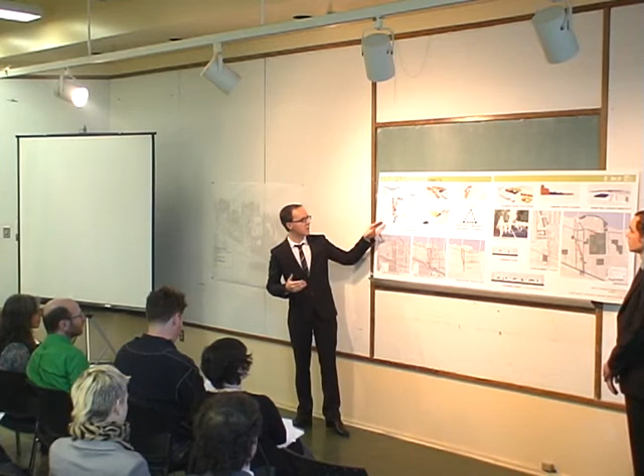In studying the area, we've identified three key issues, three challenges that the area must face. The first is poor accessibility. The train tracks to the south, Rivière des Prairies to the north, the high degree of traffic volume along Laurentien, and the size of the hospital parcel of land all serve as physical barriers that reduce the accessibility and the mobility of the residents.

Second, we've identified poor community cohesion. These barriers, combined with demographic trends and differences, particularly between the south and the north, create a lack of interaction between these different communities physically and a difficulty for that to bring them together among community nodes.

Third, we've identified an insufficient supply of goods and services. The lack of local employment and the lack of local commerce leads to more residents doing their shopping outside of the area and a low level of employment for the residents within the area.

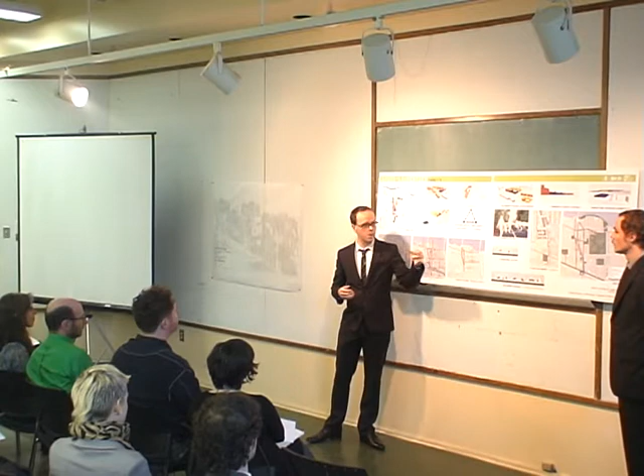So from these issues, we'd like to share with you a vision of a Gouin-Laurentien that's more livable, more walkable, more well-connected, and to put forward three goals: to improve the mobility and the accessibility of the area, to enhance the cohesion, and to increase the availability and the diversity of the supply of goods and services.

We'd like to increase mobility and accessibility primarily by reducing the role of Laurentien and La Chapelle as commuter corridors, and by reducing the barriers to internal and external connectivity.

We enhance community cohesion by removing these barriers that prohibit and inhibit groups from interacting within the community while building community nodes that can bring the disparate sub-communities together.

And we've increased the availability of goods and services by densifying certain corridors and transit-oriented developments to grow the population and increase the demand for goods and services. So these are the objectives that we'd like to share with you.

But before we go into the concrete actions, we'd like to consider the daily life of a resident in the area. Consider a young woman living in the area south of the hospital, which is primarily residential housing, a high degree of recent immigrants to Canada, and a comparatively low income to the northern, largely homeowner area.

In the morning, she might drive her car to drop off her son at school on Granite, her daughter at the daycare on Gouin, before having to drive downtown or to Marché Central to apply for a job. But her choices and her availabilities in life are dictated by the modes that are available and convenient for her. And in this case, and in this area, it's largely an auto-dominated mode choice.

So I'm going to share with you one of our primary areas of focus, being the transportation network, which is sort of a broad strokes approach.

Three key specific areas that we see for redevelopment and for densification are the Gouin Metro here in the north, the commercial sector on Laurentian Boulevard, and an area at the intersection of Laurentian and Salaberry that we've come to call Place Salaberry as the development of a transit-oriented community and commercial center, which Gabrielle will share with you shortly.

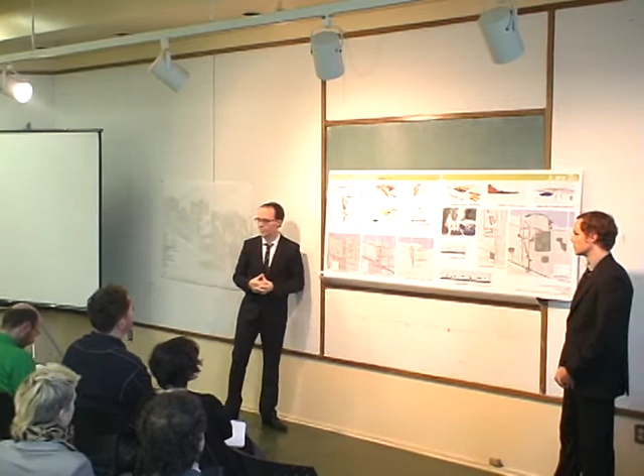So, in order to improve mobility and accessibility, enhance cohesion, and increase the availability of goods and services, three interrelated goals that we see as self-reinforcing, I'd like to share with you some of the interactions of our transportation network. Our transportation network is going to help to improve mobility and accessibility.

This is best seen through the lens of the public transportation network and the active transportation network. The public transportation network, we foresee the installation of the metro connecting at Bois-Franc and at Gouin within the next 30 years. And while that is a major change, the way in which other modes of transportation connect with it is perhaps more important.

The bus routes acting as feeder routes, as well as east-west connections, helps to resolve our objective of offering connections not only to the core of a city, but to adjacent communities. As well, the active transportation network helps to offer different modes within the area, enhancing internal connectivity.

To the west of Laurentien is a disused strip of land that was once a rail line. We see this being connected and filling a gap in the currently existing active transportation and bike lanes from the Bois-Franc station through Place Salaberry, through the commercial development on Laurentien, and connecting to the existing riverfront paths down O'Brien, to the east and west.

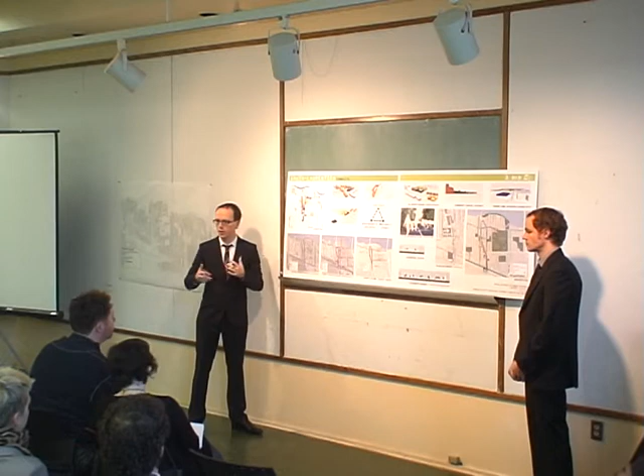With a policy of more complete streets throughout the residential area, we'd see more prioritization of active transportation and different modes of transportation to improve connectivity among the different areas and overall improve accessibility and mobility for the residents.

In terms of enhancing cohesion within the community, this is seen through interventions within the hospital corridor. Previous groups have discussed the area as a large and mostly inaccessible block of land. We would see opening up the land and removing the physical barriers in the form of fences, which currently divide the area, and the large parking lot footprints that surround the hospital. The fences are a relatively easy method of negotiating easements with the property owners there in return for borough liability and maintenance of the pathways.

The parking lots we'd see being consolidated in the northwest around Carré Gouin, the Gouin metro station, as part of a transit-oriented development of commercial and residential densification around the new metro station within an appealing public square. In this way, we'd seek to reduce the physical barriers that prevent the interaction of different communities while building a community node at the Gouin metro that helps bring different parts of the community together in these new residential, commercial, and public spaces.

Our transportation network would also seek to increase the availability of goods and services. This is best seen through Laurentian and La Chapelle. Currently these are daunting commuter corridors, largely 6 lanes wide. We would see these being narrowed in their axis, particularly to 4 lanes: 2 flow-through lanes, 1 on-street parking lane, and 1 dedicated bus lane, but also made one-directional, one way north for La Chapelle and one way south for Laurentian, acting as two parts of an overall whole in order to provide smooth flow of traffic while creating a more appealing pedestrian environment.

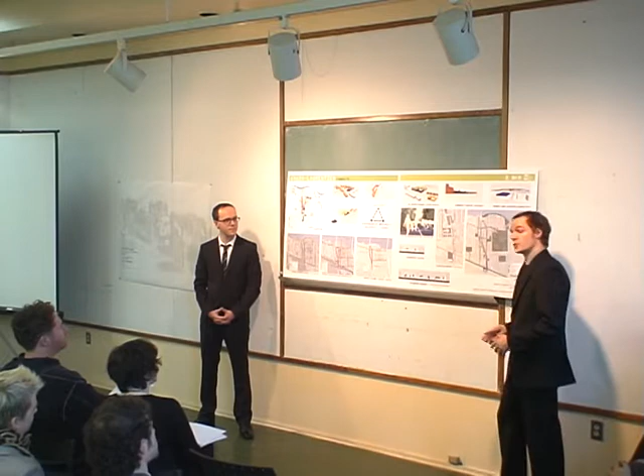We'll enhance cohesion by creating focus nodes around community nodes at Gouin, Laurentien, and Salaberry Place. And finally, we increase the availability of goods and services through the densification of some areas, which will help sustain a more diversified supply of goods and services.

So, with the full implementation of our plan, Gouin Laurentien will become a welcoming, well-connected, and walkable neighborhood. Thank you.

Questions? Comments? We have one behind you, President.

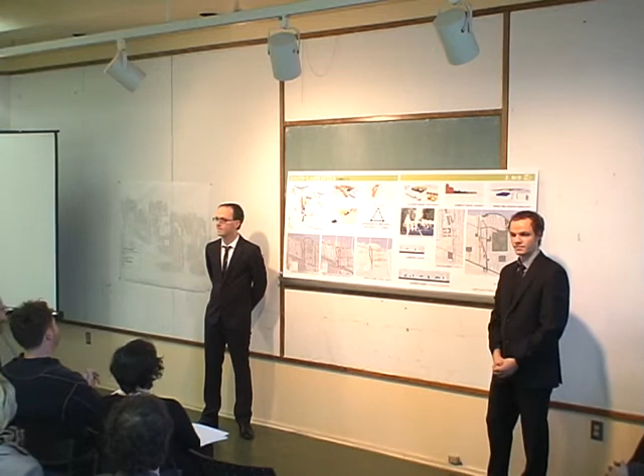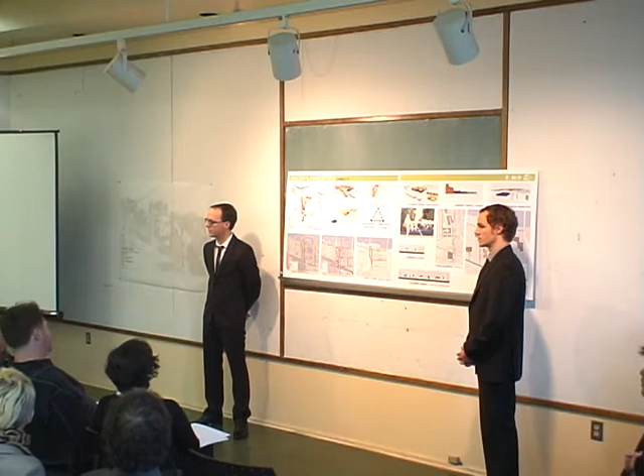I think if you guys do achieve those three points, it would bring a sense of community to people, and some of the branding issues might be solved through the three groups you're all discussing. I think people would feel the community is a nice place and that it's connected, with eyes on the streets—not just some places you pass by where no one can access it. It might deter some vandalism and the issues of having a darker sense of community.

That was very much our hope. And I think that's what I got from the three presentations together. It's a very apt comment—the point we were trying to make about the interconnectivity of our goals, and how it connects well with all the rest of the goals of the other groups as part of a comprehensive plan.

So thank you. How do you see Gouin Boulevard as an east-west connection and as a place? I mean, we didn't discuss that very much. There's a new metro stop at Gouin.

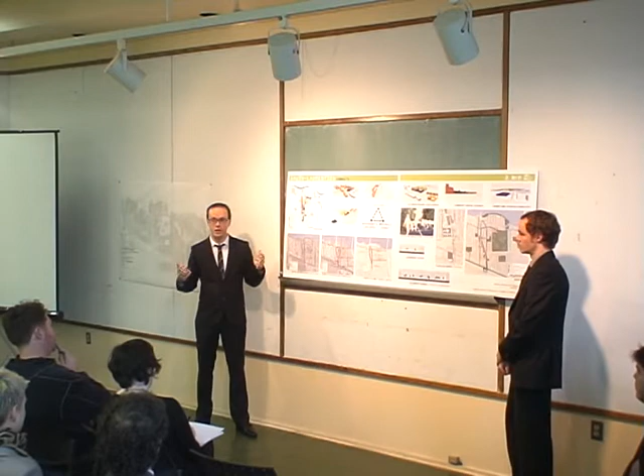What's the Gouin corridor in 30 years from now? One of our objectives, within increasing mobility and accessibility, is increasing connectivity to surrounding areas. We worried that with the metro connection, we might simply become a bedroom community for the core, with people only wanting to move toward the center of the city. We saw Gouin's ability to connect to adjacent communities, and particularly to act as a connection with the metro, as a draw of people from adjacent areas to come in.

That was the point of placing the Gouin Metro not simply at the intersection of Gouin and Laurentien, but in an area where it acts as a destination in its own right, connecting the strength of the Sacré-Cœur Hospital, and building a transit-oriented development around it that would bring people on the bus lanes along Gouin to that destination so they can access downtown but access our area as well.

And what is the site of that TOD on Gouin? What is it currently? The current site is primarily a parking lot and a Videotron beside it. There aren't that many video rental shops opening up in the city recently — we see them closing down. We see that as an area that can be redeveloped, particularly with the large footprint of parking lots around it.

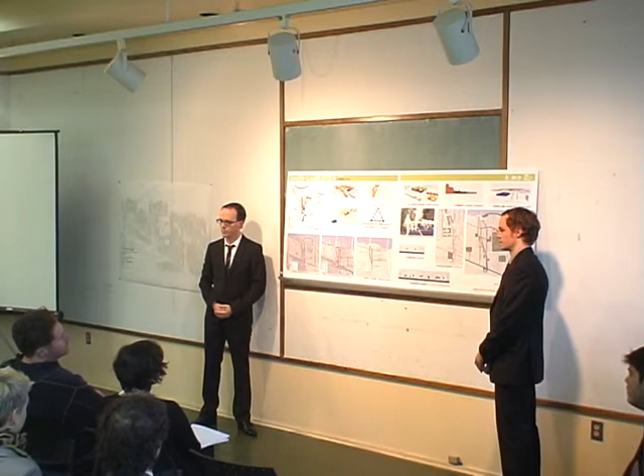So I want to ask you the same question Professor Bronstein asked: phasing, what do you do first? Do you reserve land for the metro stop up in Gouin, work on Place Salaberry, or... I think the first step is identifying that there's a vast number of stakeholders involved in a project such as this.

If the STM is going to site the Gouin Metro there, they are going to need to initially purchase the land. But if we're going to narrow the streets along Laurentien and Lachapelle to create a more welcoming pedestrian environment, the borough and the city would need to undertake negotiations with the AMT due to the dedicated bus lanes currently existing there. So we need to identify all these stakeholders and find out what's actually within the realm of the possible.

Redeveloping at Gouin and at Place Salaberry, we see this as land that's going to have to be purchased for the major redevelopments, but it can be financed in part with these transit-oriented developments. Particularly around Place Salaberry, which Gabrielle discussed, it's already municipally owned land. Monies can be earned by the city through selling land and development rights to developers in order to fund the other projects we have in mind. So by identifying stakeholders and figuring out funding opportunities from existing municipal strengths, we think it's ambitious but realizable.

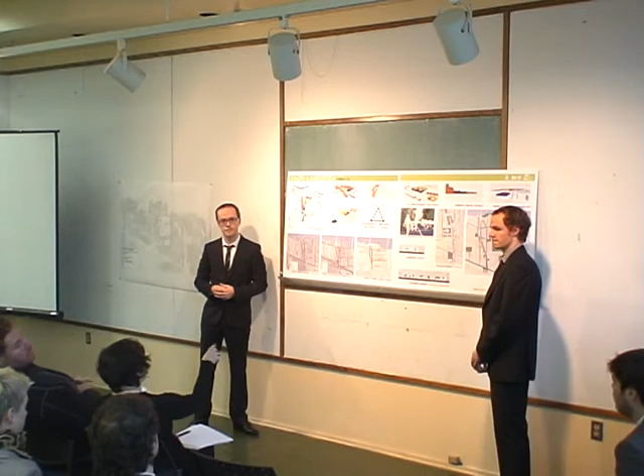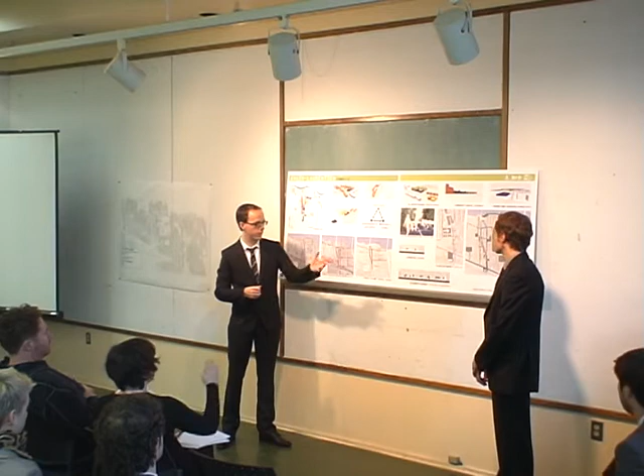Could you just explain the bottom section? It looks like a very wide expanse of transportation. Here on the right? Yep, the bottom section there. Where is it on your plan? The section is over here, and the idea we had is that currently there's a triangle here that makes the traffic flow very confusing.

So our idea was to divide that triangle and put more public space toward both sides of the street so it's balanced on both sides. The section is right over here, and the idea would be to have a very wide, welcoming place so that pedestrian flow, traffic flow, bicycles, and everything are contained into one area. But the section actually shows the connection — this would be a corridor primarily for transportation modes, and the idea would also be to have more life for pedestrians.

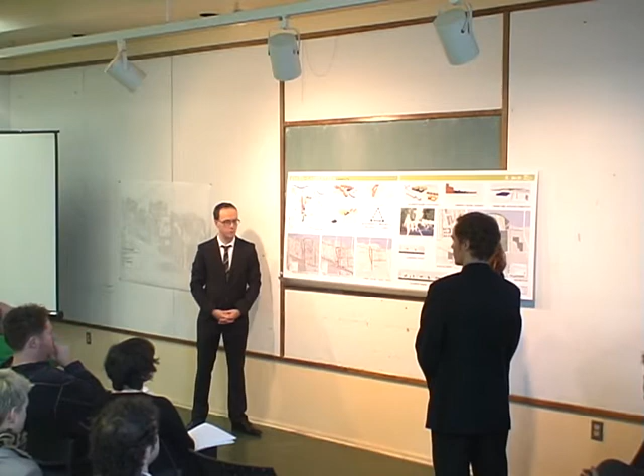So what you have in essence are two public spaces. Yes, public space in the east, in front of these buildings, and public space in front of the community center on the western side. I see. So it's not one thoroughfare — it happens in two places.

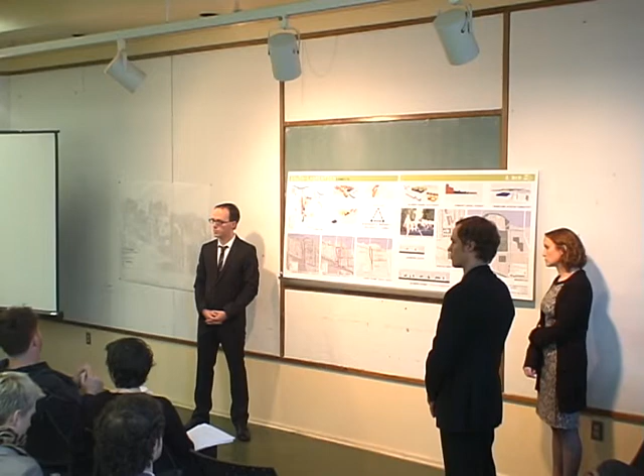One comment: you explained the reasons why you decided to use both La Chapelle and Laurentien as through traffic ways, with an additional offer in terms of public transportation. Why didn't you consider reducing the through-traffic offer to only one of those streets? We would foresee that La Chapelle, being a more residential area, could benefit from not having that through traffic in the future, so we tried to concentrate everything on Laurentien instead. So that's one concern — I think you have your reasons for choosing both, but in the future it might make sense to eventually use only one of those streets.

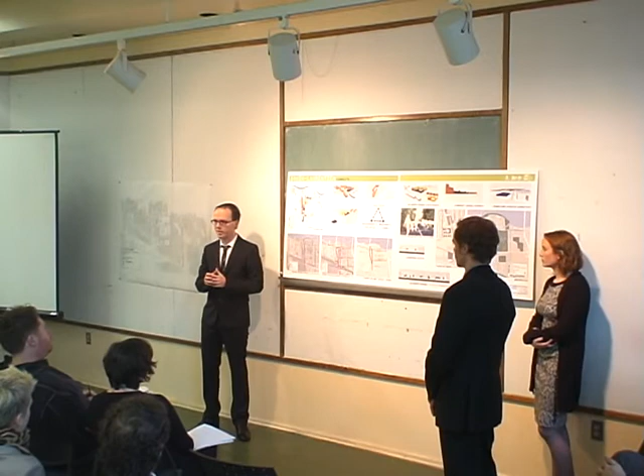That's very much one of the issues we were grappling with in the redesign, particularly of the Laurentien, La Chapelle, Salaberry intersection. As Ellen was mentioning, we contemplated different designs for how that would work, because it's a very confusing and chaotic location right now with commercial locations surrounded by heavy traffic streets on either side, and residences separated by commercial in the middle of what is essentially a provincial highway.

Some of the things we've considered is the different character of the streets of Laurentien and La Chapelle. Laurentien can be redeveloped for additional residences, but has a commercial life that La Chapelle lacks. So if the decision were made to reduce traffic more on one street than the other, La Chapelle would certainly be the logical choice. Overall, with the addition of public transit, narrowing of the street, and improvement of pedestrian infrastructure, we can still have a constant flow of traffic, but an overall reduced volume that wouldn't be out of line with either a minor commercial street or a comfortable residential street. Your comments align with the discussions we've had.

Is there any potential for a bicycle path system to contribute to connectivity between different areas of the neighborhood? Absolutely. One of the points I was making around improving mobility and accessibility is the active transportation network. There are some areas where we propose new bike paths, particularly to the west of Laurentien, connecting from the transit hub.

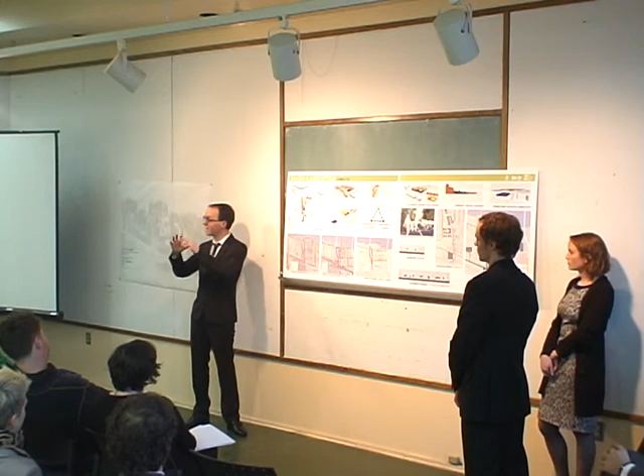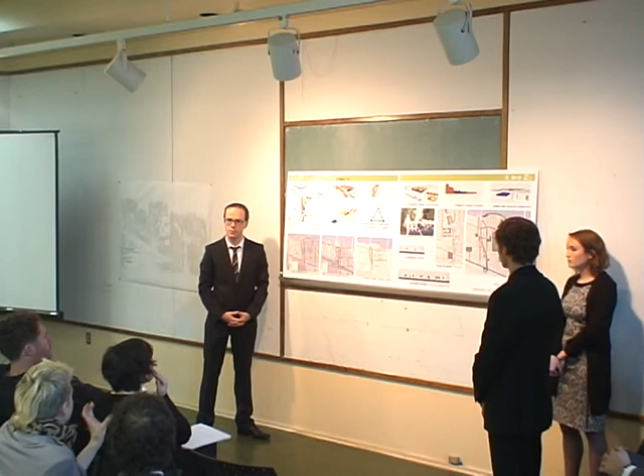I just have a question about the bike path along the train line there. I'm just trying to envision it. Would it be up near the platform, or would it be alongside it?

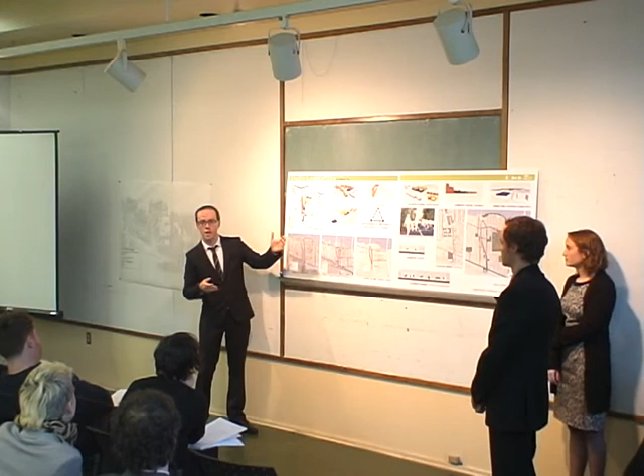What you see alongside the rail track there are residential areas and some community gardens. It would make a very nice area to connect, particularly with the intermodal station at Bois-Franc—to have that not at the high grade of the rail line, but closer at the low grade of the residential and commercial area on Laurentien.

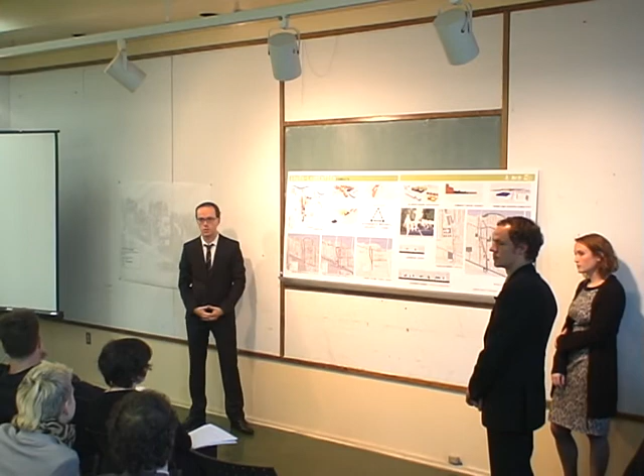You guys did a really good job presenting, and did a really good job interacting with your boards, specifically not using PowerPoint. So good job at that.

My question is about lighting. Did you guys look at lighting around the neighborhood, particularly around the hospital, because it has 24-hour use, and around any night routes for night buses in the area? What's the state of lighting, and do you have any suggestions for improvements?

We did take a look at that, particularly around pedestrian access. The hospital right now is accessed almost entirely from the north—there are very few other access points. So if you're trying to get in from the south, you're entirely at a residential street and you're blocked. If our plan for an active transportation network across the hospital were implemented, putting in proper lighting would certainly be a concern, because it's a very isolated area with the nuns' convents developments around it.

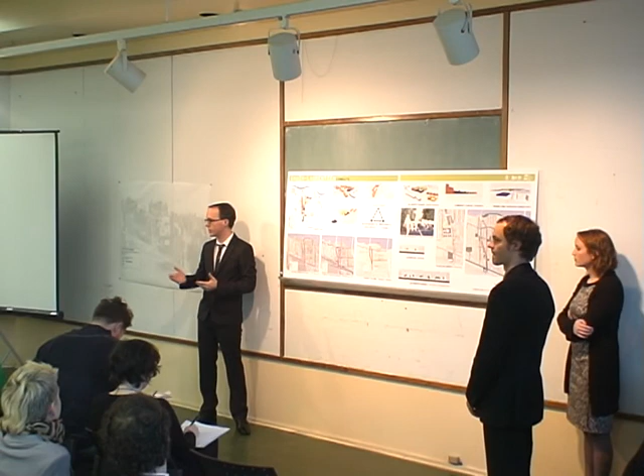In addition, the connections along the active transportation network and bike paths—the rail line acts as a barrier across the south, so if there are going to be crossings for pedestrians at the rail line, those need to be not only well lit, but also well designed and well secured, as at-grade crossings are somewhat of a risk.

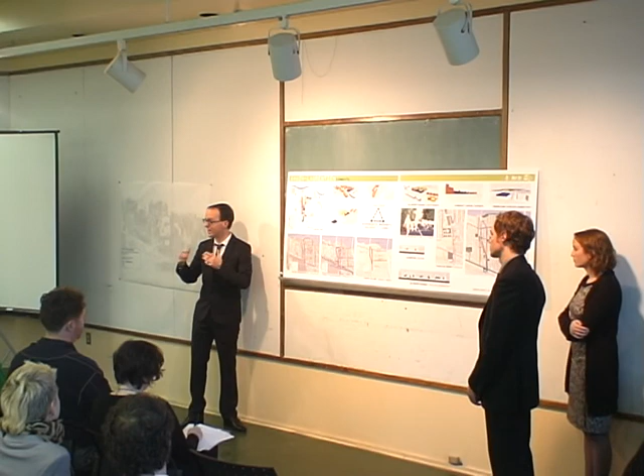Within the area at the moment, it has standard Montreal residential street lighting, which isn't insufficient, but if there's going to be heavier redevelopment at Place Salaberry, Laurentien, and Gouin, you need to look not just at increasing the lighting, but also mitigating light pollution for existing residents. So lighting would certainly be a concern.